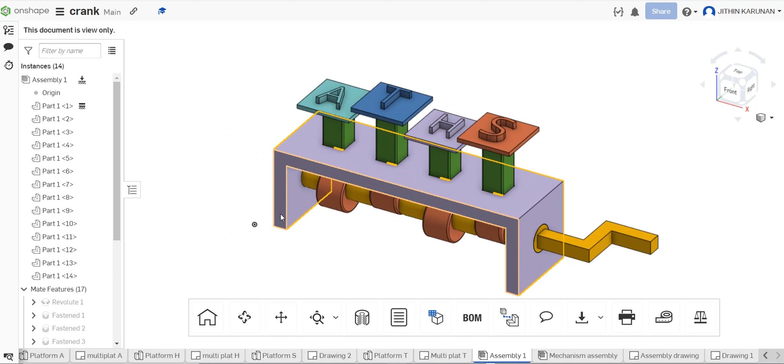Hi students, today we will be discussing the assembly drawing. First we have this base shape, then we have already designed the crank, then we have the cam assembly and shaft and this ATHS plates. Now we are going to design the shaft and also the cam arrangement. Let us start with our task.

The first drawing is this. We are drawing everything in millimeters. This is the shaft that we are going to draw. First we will draw this shape which is in the top plane, and the size is 16 by 16, 16, 16. To the center of it we need to have a hole of diameter 4, and this is actually a thread having diameter 4 and pitch 0.7, and the height of it is 50.

Let us go to our drawing and check how it is done. First and foremost, rename your file as SHAFT. Then set the units, set the workspace unit. Make sure the workspace unit is in millimeter. Make sure you draw it in the same page itself. We are going to draw everything in the same page.

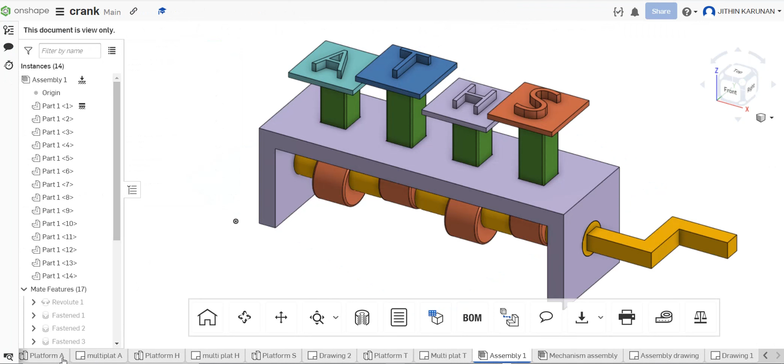For that purpose, you need to add a plus. Go to create Part Studio, click on the create Part Studio, go to this plus symbol, then click on create Part Studio, then the new Part Studio will open up. Make sure your workspace unit is represented in millimeters.

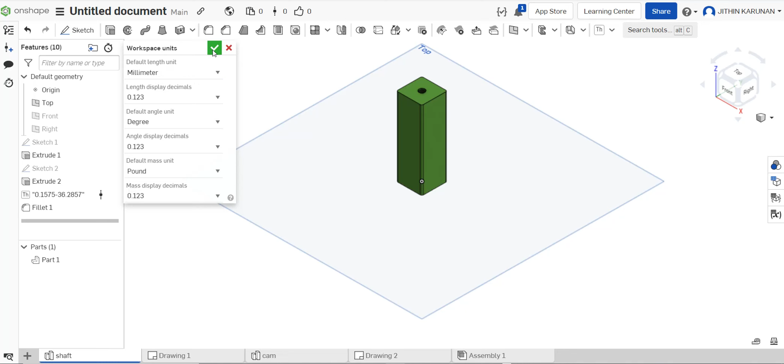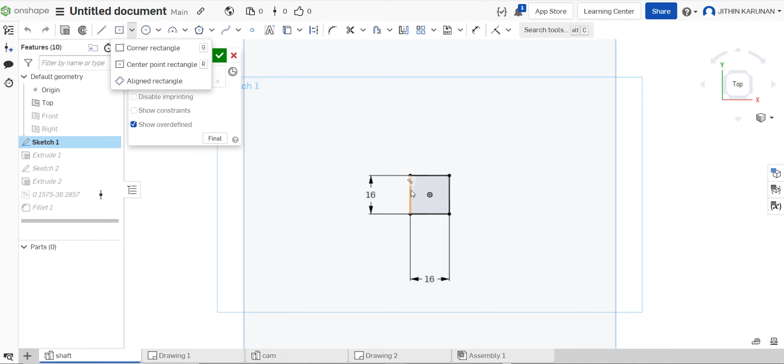Now you need to select the top plane, and sketch. First and foremost, select a rectangle, select a center point rectangle, click on the center, draw the rectangle, select the dimension, select the first dimension as 16 and select the second as 16. So it is 16, 16, here also it is 16, 16. Just draw a rectangle, select this center point rectangle, draw it and complete the dimension on the sides as 16.

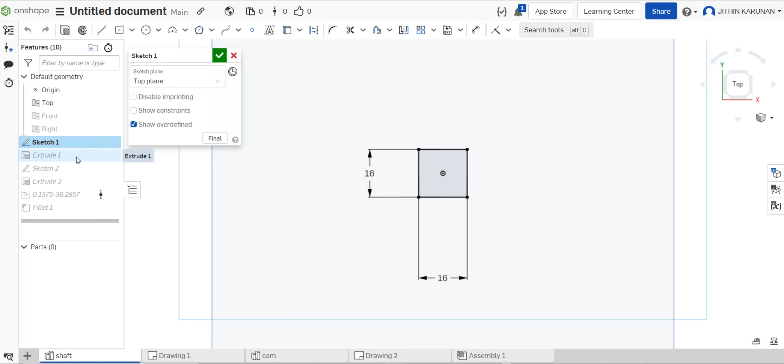Once you are done with the sketch, click, then move forward to extrude. Now it is adding extrude new, give the depth as 50. Since it is the height, you can see that the height is 50, so we are going to extrude it up to 50, 50. Then click on this surface, and give it a tick.

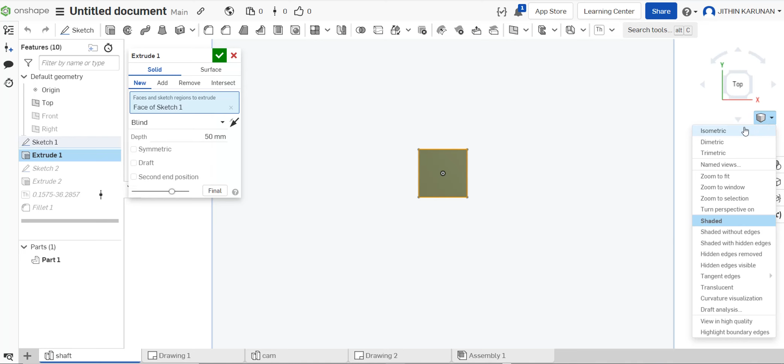Then you can change it to isometric. Go to the cube here, click on the isometric. In the isometric you can see that the height has been completed. Once it is done, now we need to make a hole here. Just like that, we have a hole.

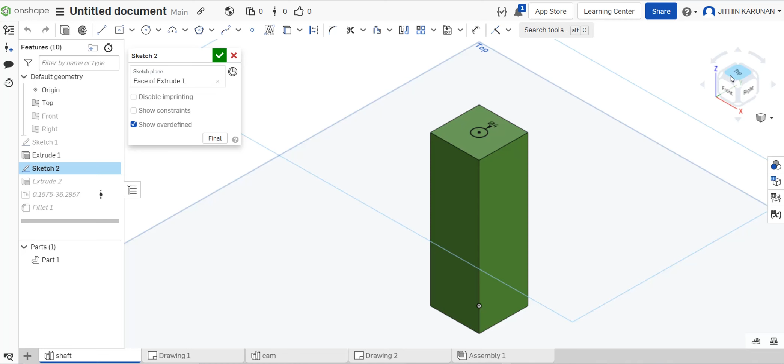Just select this surface and go to sketch again. Then in the top, select a circle, select the first circle here, come to the center, draw the circle and give the dimension. You have the dimension here, give the dimension as 4. You can see the dimension as 4.

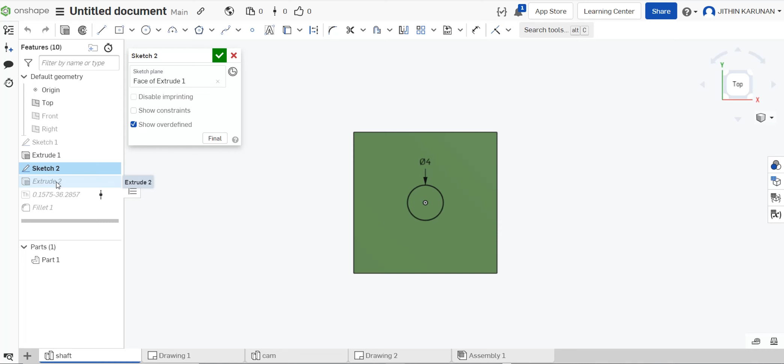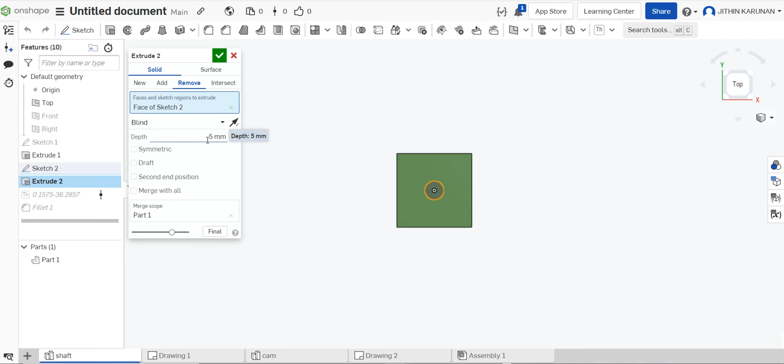Next you are going to select extrude. We are going to make a hole here. You can see that in isometry, extrude, extrude remove, and give the depth as 5 mm. Why 5 mm? You can see the depth here in the drawing. It's a hole here, the depth of the hole is 5 mm, so we need to make the hole until 5 mm. Then click on this circle, and if you see it in isometry, you can see that the hole has been created.

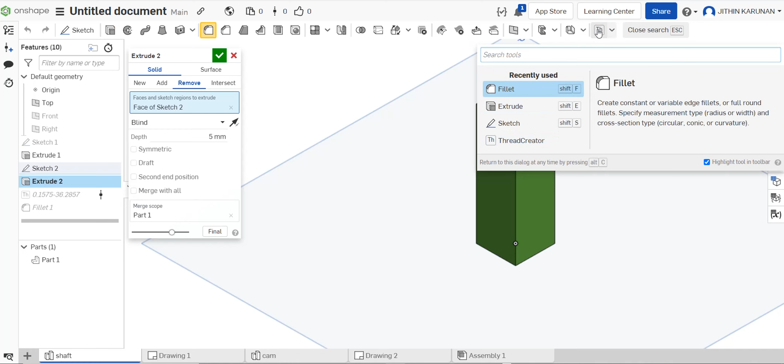The next part is very important in this drawing. Now you need to select thread. How to select thread? Many of you, since we have done threading in the last terms, may have this thread creator, or else you can click on this. Here there will be a search tool. In the search tool, you can click thread creator, and you will have a symbol coming up just like this. Click on it and it will add to your window here. So once you have this, click on this thread creator.

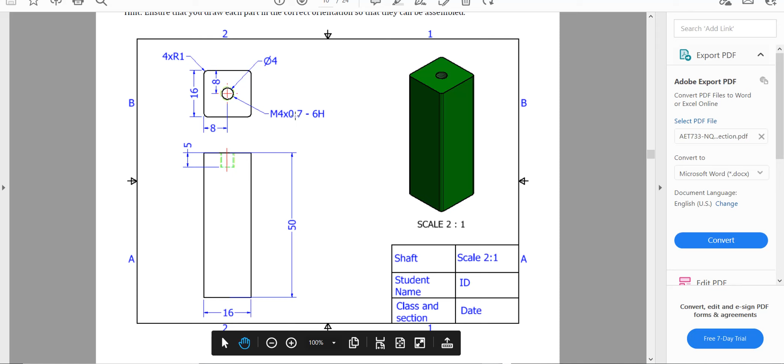In the thread creator, we'll go with the standard ANSI thread, and we'll give the pitch as 0.7. You can see that our pitch value is 0.7 here. We give the same value in here also, 0.7. What you need to do is select the inner surface. Please look at my mouse, you need to select the inner surface just like this. Click on the inner surface here, and automatically your thread will be created.

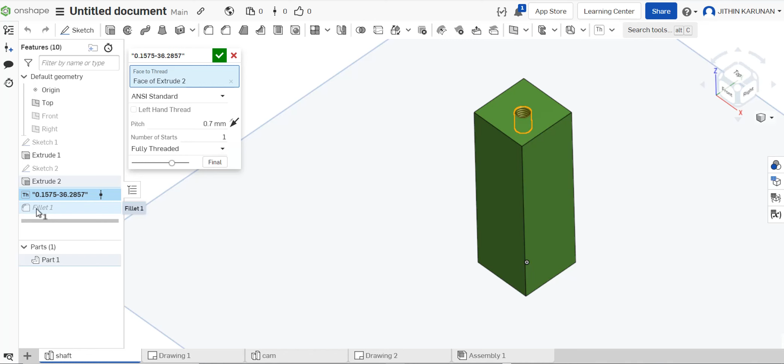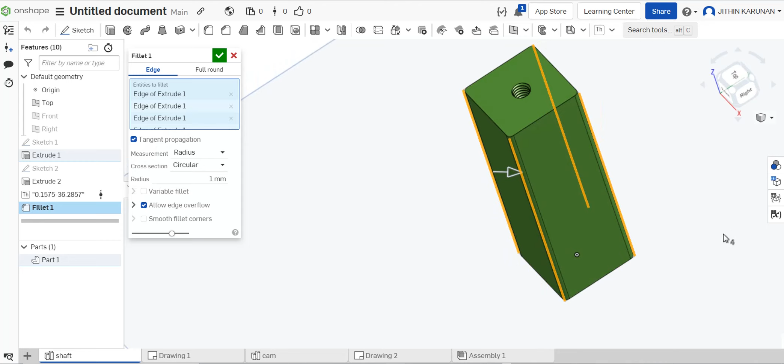Once the thread is created, next is an option for fillet. So here is the fillet. Select the normal fillet here. Radius, give the radius as 1 mm. Now you need to select the edges. Select the first edge, second edge, third edge, and fourth edge. Select the 4 edges and it is done. Select the 4 edges and you'll have all the fillets coming up.

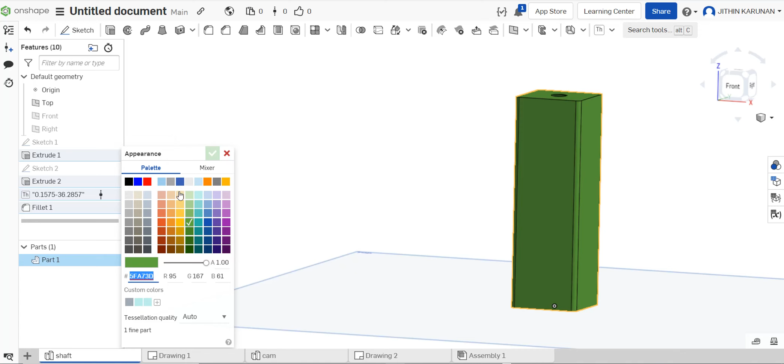Now we need to give the color. As you know, right click on the part, go to edit appearance, give any greenish shade which is similar to our drawing. That's it.

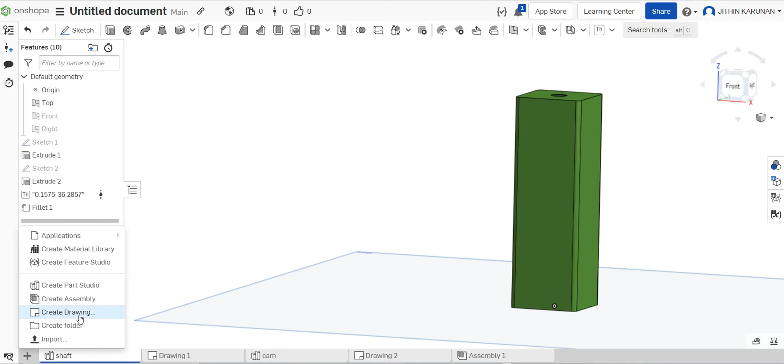So with this, now we have completed our task with the shaft. Now you need to go to this plus symbol again and create a drawing here. So here you have drawing 1, it will come up just like this. Right click, rename, shaft multi view. Rename it as shaft multi view.

As you know, when you are here, automatically insert will come up. From the insert, whatever we have done before, just put it in. Click here, then move it upwards, again move it to the right, and you'll have this multi-view of our system. So here we have the numbers, which is our dimension.

For that, you just need to click on the dimension, just like what we have done in our drawing. Click on this edge and it will give you the number, first select this edge and this edge, it will give you this number. This edge, it will give you the number again. So similarly, by using the dimension symbol, you can keep the dimensions also.

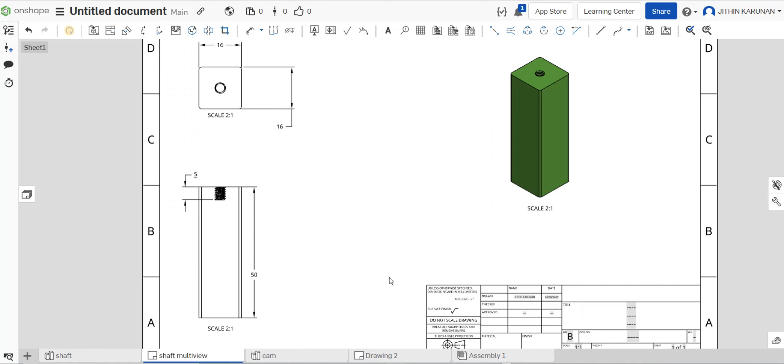So with this, our shaft is complete. The next part is cam. Cam is this one. You need to draw only one cam, then we can replicate all these cams. So it is an easy part, cam. So directly we'll go to the cam.

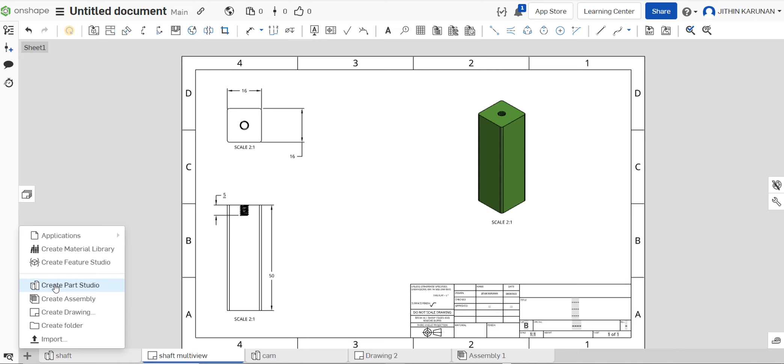Again, you have to press here because we are drawing everything in single here. Again, go to create Part Studio, click on Part Studio, and it will come up here in the new page. Right click, rename it as cam, CAM, rename it as cam, and of course make sure your workspace unit is in millimeter. The workspace unit should always be in millimeter.

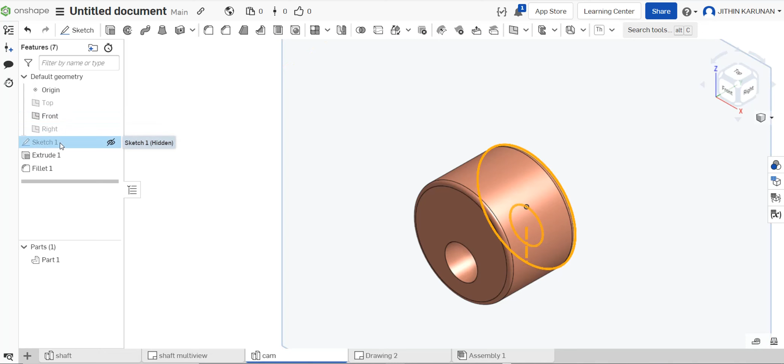Drawing cam is pretty easy. So we need to select the front plane and you need to sketch in the front plane. So what are the dimensions? First select a circle, come to the center, draw a circle of diameter 30. Select this dimension and give the diameter as 30.

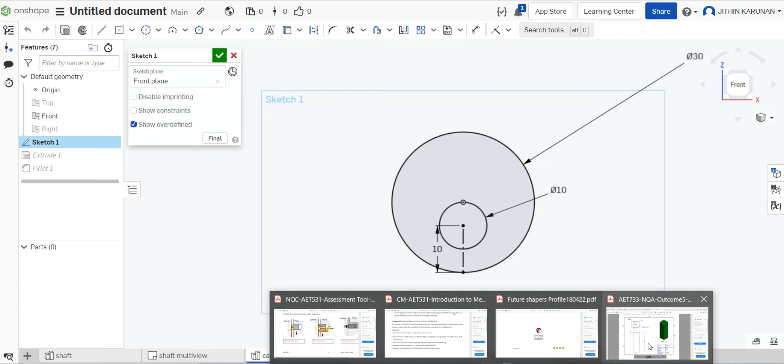The next thing is, which is this circular part, which is at a distance of 10 mm from here. So how it comes up is from our drawing. You can see the drawing here, which shows you the actual shape. So here you have this is the top view, the front view and the side view. Here you can see that the distance from the center of the circle to here is 10, and of course this circle is also 10.

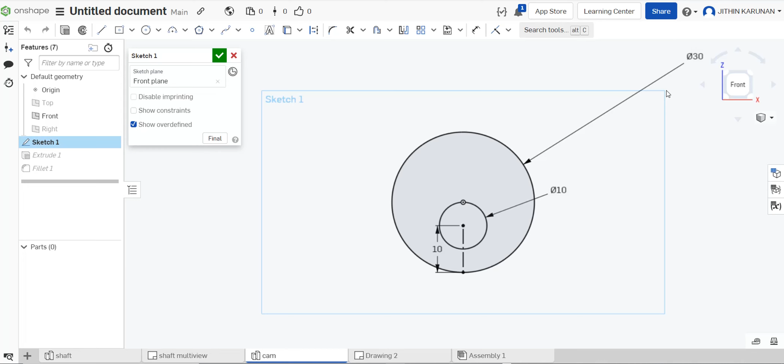So what we'll do is first draw the circle of 30, then after that select a line from the center, just scroll down, it will show you the straight path. Then draw a line of 10 from here. When you scroll down, don't click anywhere, it will show you a straight line, and click on this place, then draw the line of 10.

Once you do that, click this line and make it construction, because we don't need to, we are not going to extrude anything with this line, so make it construction. After this, now you got the center of this circle. Now select a circle, draw a circle of diameter 10.

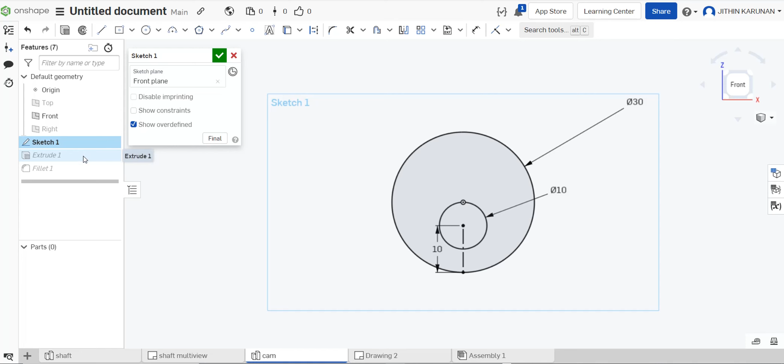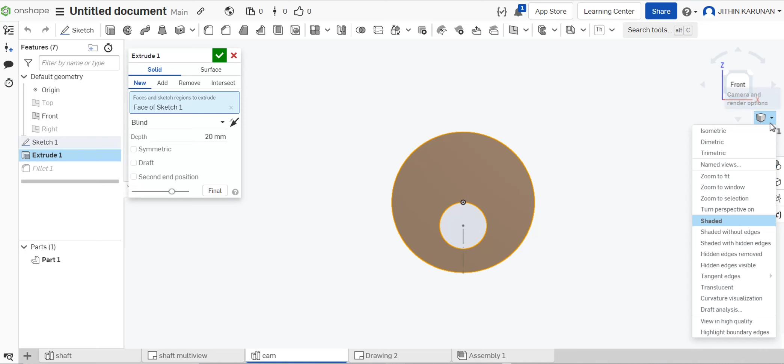The next step is pretty easy. Now we are going to extrude it. Extrude, select the depth as 20 because the height of the cam is 20. You can see the height of the cam here is 20, so we are extruding it up to 20. Now it is, the depth is 20, select it, give the depth as 20, select this portion, make sure that you select this portion exactly. Once it is done, you can see in isometric our shape is created, the cam shape is created.

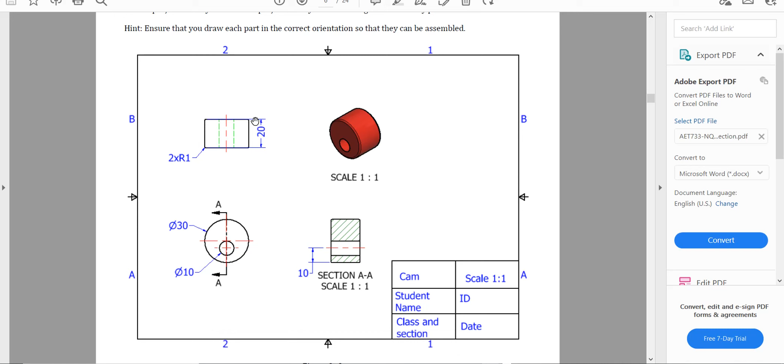Once the cam is created, next we need to do the fillet. The radius is 1 mm. As it is obvious from our drawing, you can see here the radius in two portions, here and here both sides it is 1. So it is fillet. Again click on the fillet, radius, give it as 1, select the first edge, select the second edge. So with that, cam is also complete.

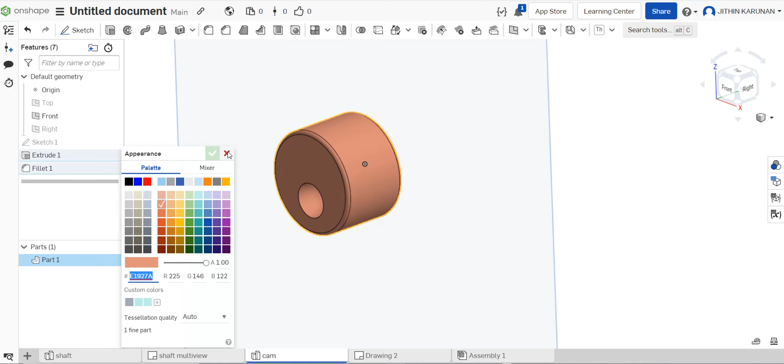Then right click, edit appearance and give any color which is similar to this reddish color. After that, we are going for the multi-view of our cam. So you can rename it as cam multi-view.

So you know that the cam will come up. You can select the cam from there, put the cam here, here and here, third one. So how to make this shape, the shaded shape? You just need to click on a symbol here, section view. I can show it.

Section view, just click on this symbol section view, come here, it will show you an arrow, move it to the right, it will automatically create, click and move to the right, and it will create this shaded view.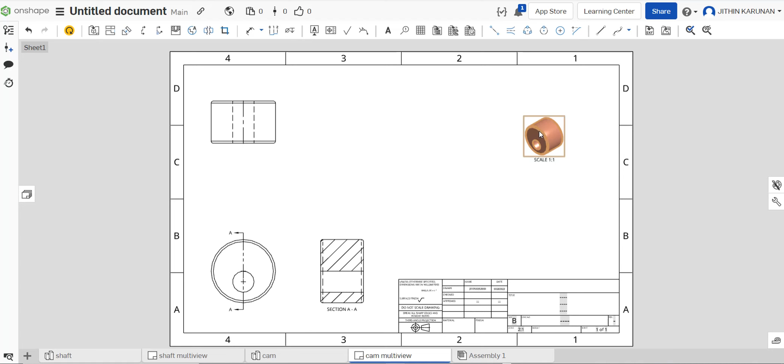Now the last thing that we need to do is, after this escape, you can right click on the surface and make all this hidden and all this. So all these steps are similar to whatever before, only the change is this section. Then the section comes up, select the dimension, give the dimensions for all these things given in our drawing, then complete it and upload it onto your ClassKick.